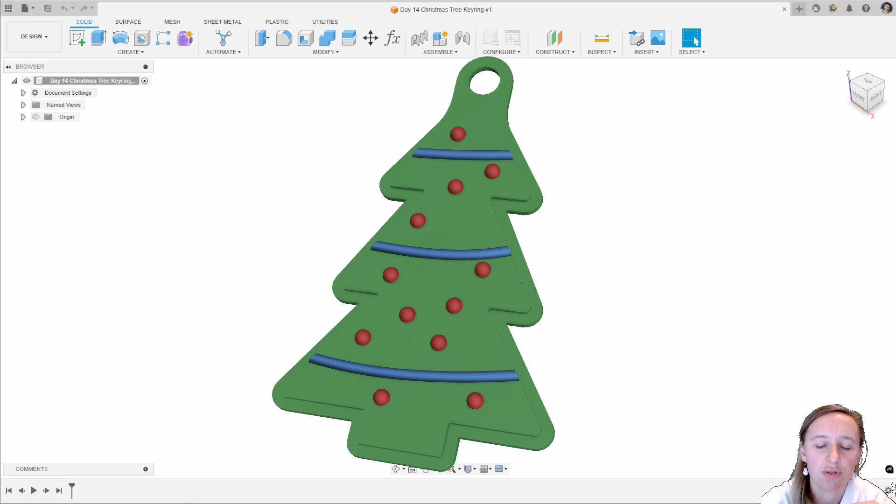For today, we are going to be designing a little festive Christmas tree keyring that you can print on either a dual colour printer or a single colour printer. If you've got a fancy printer like the Bambus, you can start putting in multiple different colours. They're just these small little trees, and we'll go through how you do this in Fusion.

Starting off, I'm going to create a sketch on the XY plane, and this is going to be the basis for my keyring. So I don't want it to be too big. I'm going to give myself a line for the height of this. I want this a construction line, and that's going to be 31.5 millimeters - that's just my overall height of the keyring.

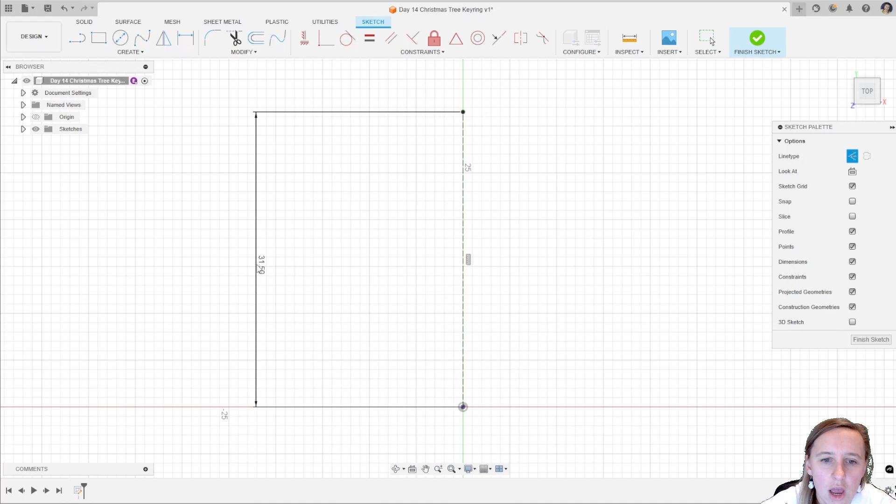I'm then going to use the line tool, turn off construction lines, and just build up that Christmas tree shape that I want to have, give it an outline, and then I will start adding in some dimensions.

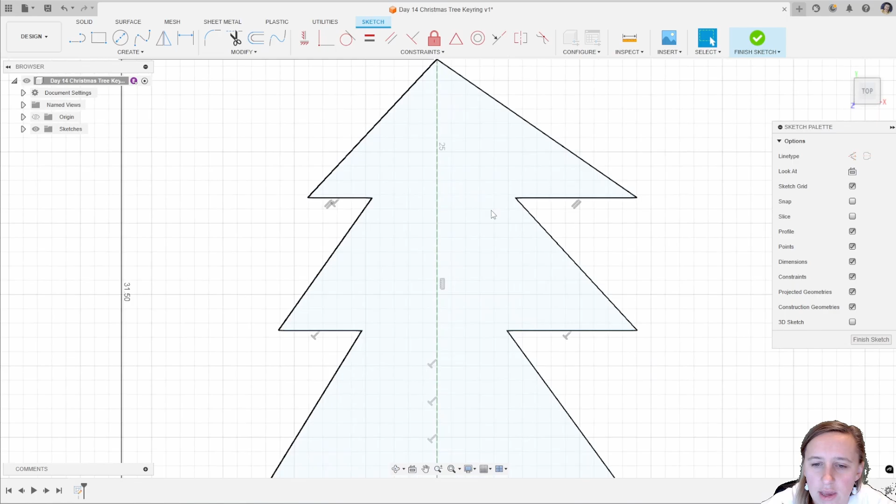I'm using the trick where I take off a line to make sure that they are collinear. The first dimension that I want is this one down at the bottom, and that is going to be 24. I'm then going to add in some symmetry, using the constraints and symmetry, selecting those two top ones, my center line, the next two, my center line, and then the next two and my center line.

Now I want to bring a midpoint constraint of that line at the bottom down to the origin. I'm then going to add a dimension from here to here, and I want this to be evenly split over the whole height. So I'm going to grab that dimension and click divide by 3.

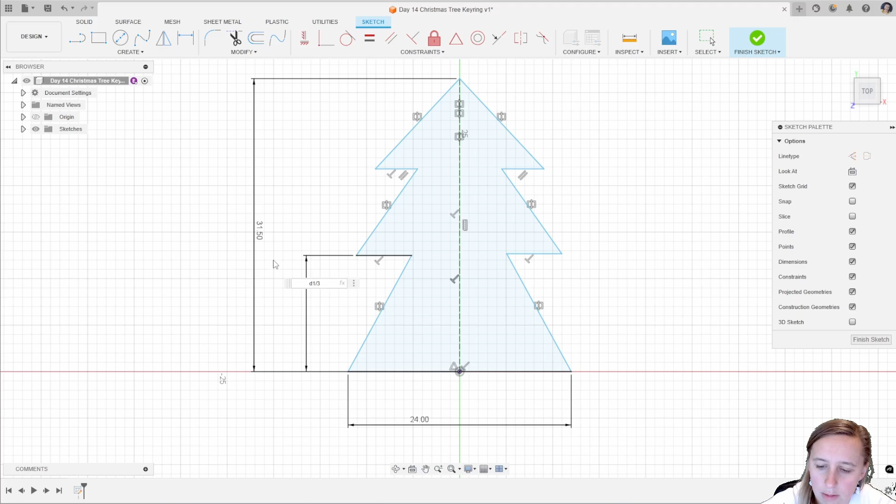And then the same for this one. So you can either type in the same, or I can just click that dimension there, and that will snap into place. I'm going to add a collinear constraint between this line and this one, and again, a second collinear constraint between this line and this line.

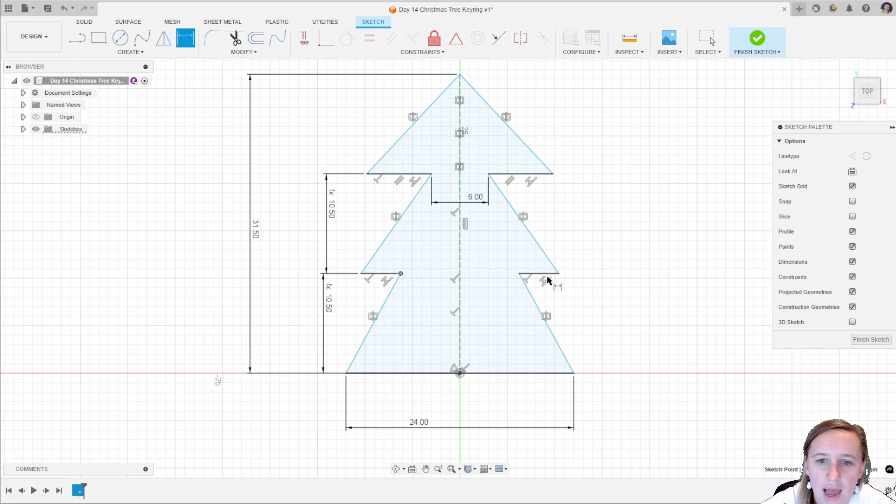I then want to add in a dimension of 6 millimeters here and a dimension of 18 millimeters here. That one is 9.75, and between there and there is going to be 18.

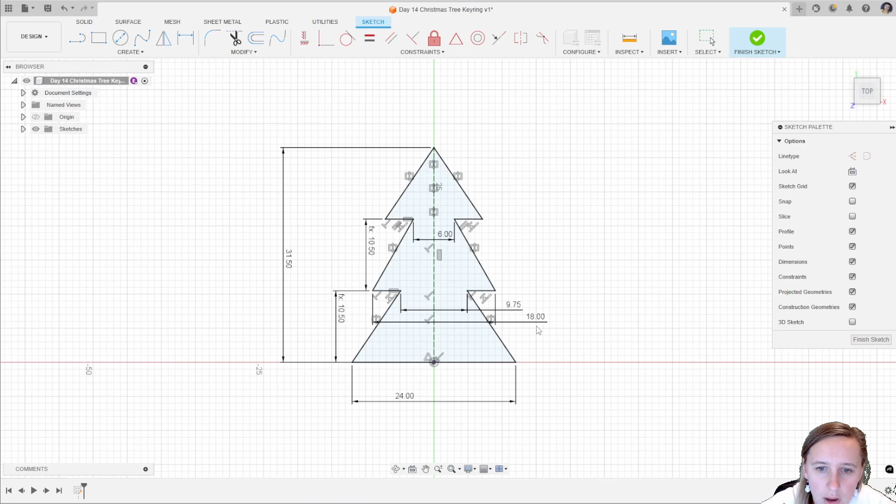I then want to add in a dimension of these two, and I'd like those to be equal. And that there gives me my overall dimensions on the part, and I just want to add in a kind of bottom piece for the trunk of the tree there.

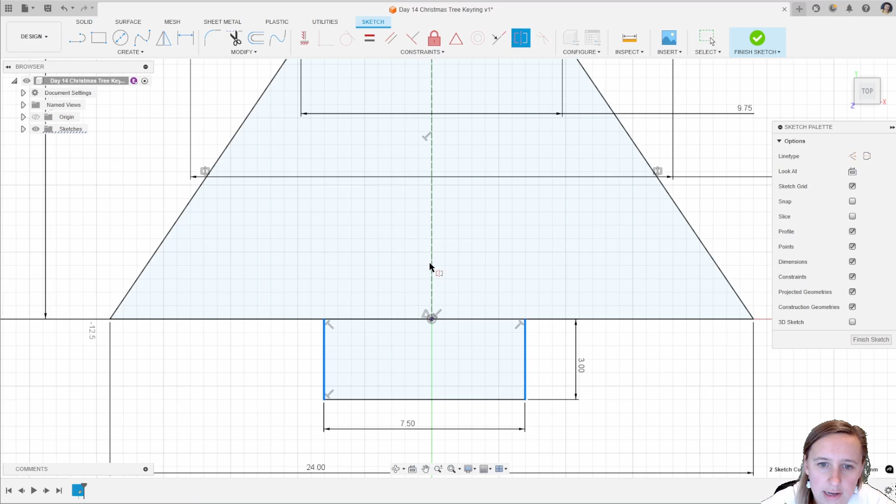So I want that line to be horizontal. The dimension of that I want to be 7.5. This one to be 3, and another symmetry - so I want that line and that line to be symmetrical around there. And you can see there that gives a fully defined and constrained sketch.

So I'm going to click Finish Sketch, and then I'm going to extrude those two profiles by 1 millimeter, so 1 millimeter thick. I'm then going to add in some fillets.

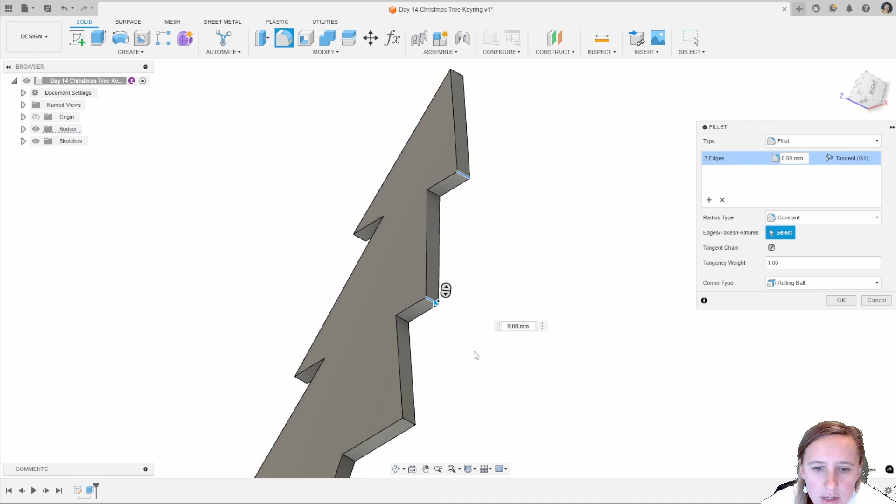Using the fillet tool, I'm going to do these 6 points on the tree. So grab all of those 6 points, and that's going to be a fillet of 0.5. I've accidentally added one, so unselect that one and add that one. So there we go, that's 0.5.

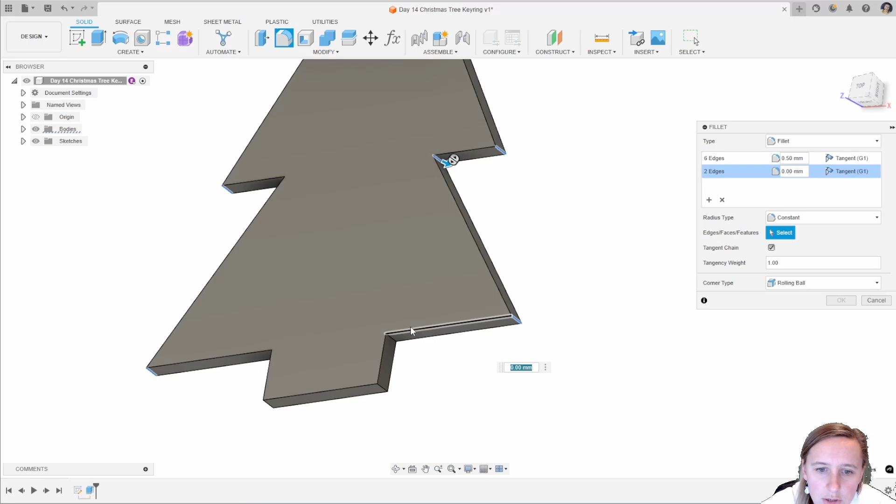Clicking the plus button to add in some further fillets in the same operation, I'm going to grab all of these kind of internal ones and the ones around the bottom of the trunk there - this is just going to give it a slightly smoother finish for the print. So that one's going to be 0.2. And then the final one I'm going to add is to the top, and that is going to be 1.5, just to round off the top.

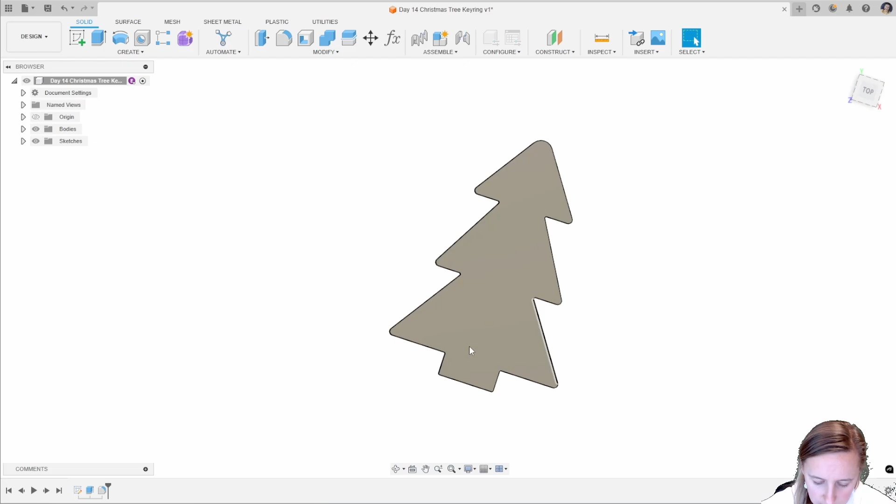And there is our basic outline of the tree. I want to add some decorations to this, so I'm going to use a little trick - I'm going to create a spline and then use the pipe tool for this.

So creating a spline, I just need to go off the edge of the part, adding in these 3 lines that are going to be my tinsel on the tree. And then what you can do with the spline tool is just use these handles to give it a little bit of bend, a little bit of shape. So that line is kind of how you want it to be.

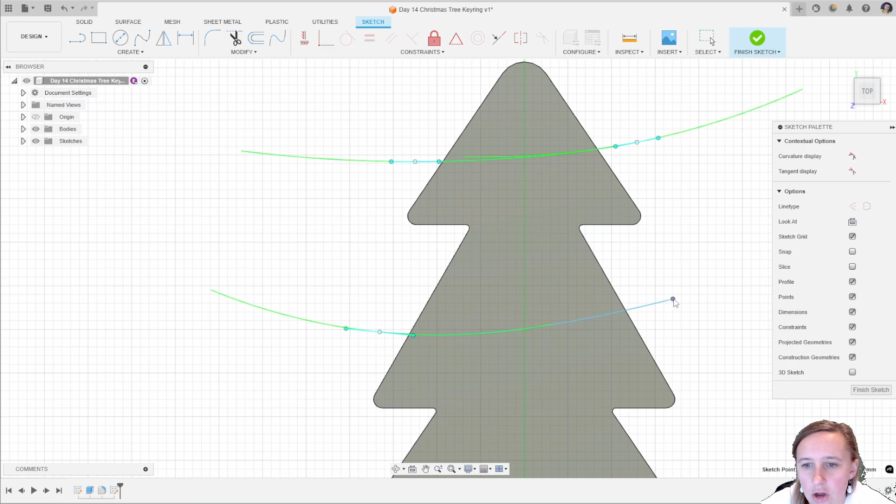And you can sort of add as much bend and as much shape as you like into how you want the tinsel to look on your part. So just play around with that until you're happy with how it looks.

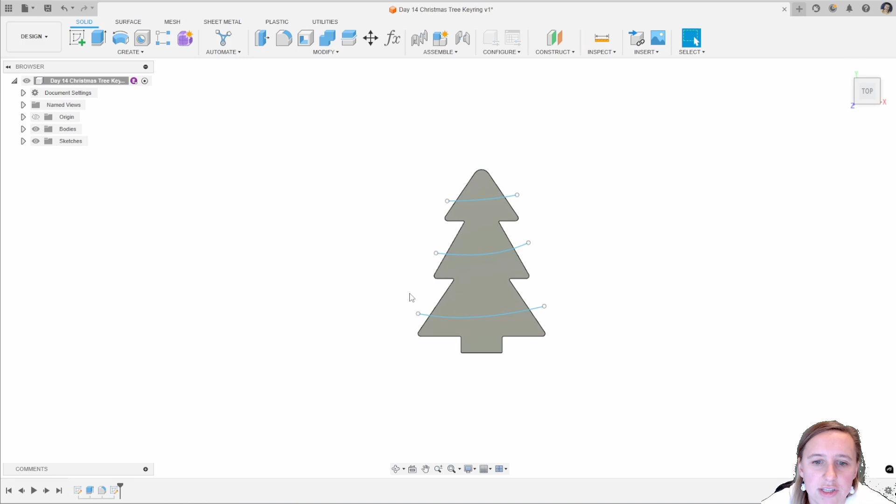And once you're finished with that, click Finish Sketch. We'll then create a pipe. Using the pipe tool, I'm going to grab this - I want the section size to be 1mm and I want to join that.

Clicking OK. You have to do these as 3 separate operations, so just view your sketch, create a pipe and do that again for each of the 3 tinsel pieces in the sketch - create and pipe, and then the operation is join on that.

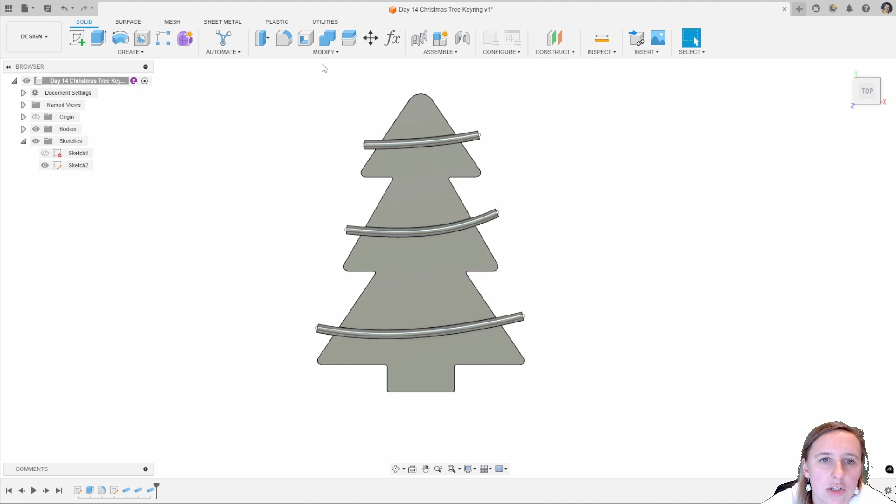I then need to cut off the excess, so I'm going to modify and split body. Select the body that I want, the whole thing, and then the profile is the outer profile of the tree. Just check that's extending as you want it to and click OK.

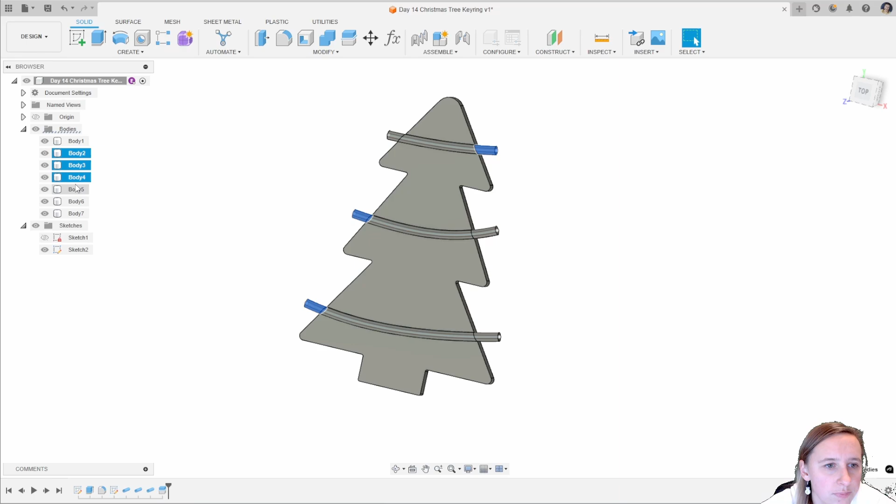We've then got a number of bodies, so selecting the 6 bodies that we don't want in the tree here, right click and remove. That gets us down to just the single body that we want for this tree.

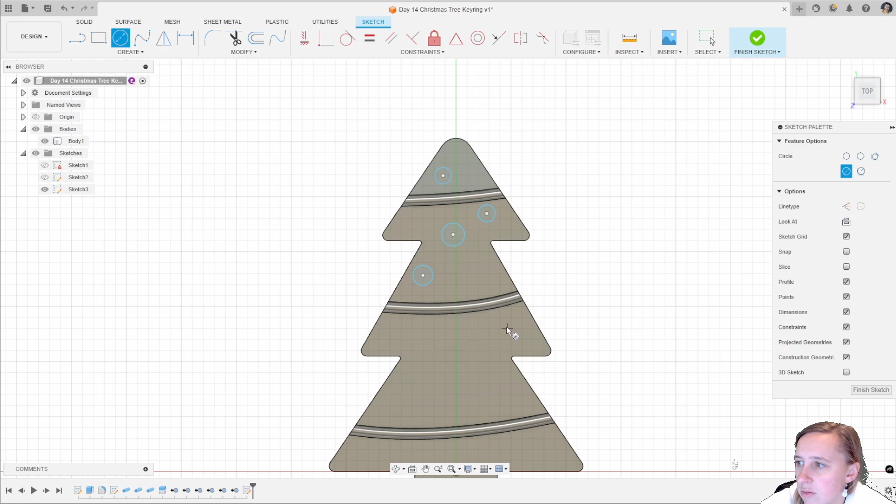I'm then going to add in the baubles. So creating another sketch on that top plane, I'm just going to draw some circles where I want the baubles to be. It's up to you where you want to place these, spread them around until you're happy with how that looks. You can add in as many as you like and place them wherever you would like on your design.

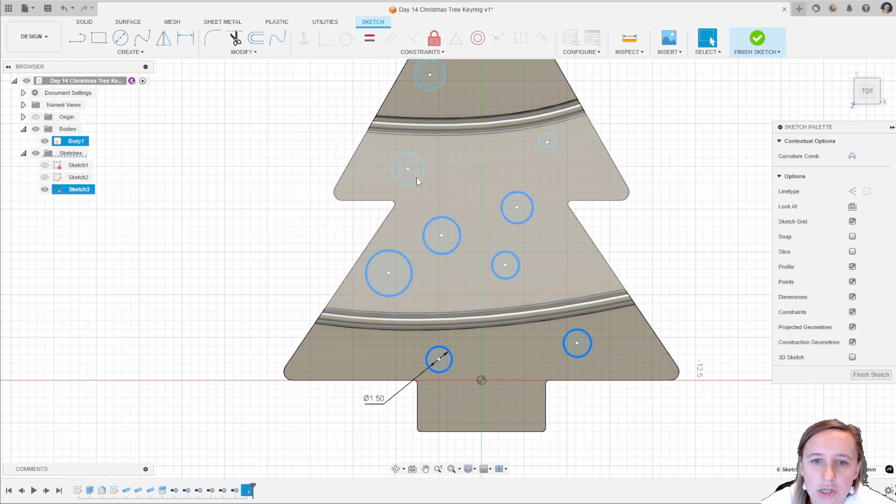Now I'd like all of mine to be the same size, so I'm going to dimension one of those as a 1.5mm diameter. Then select, using the Shift key, every single one of those circles I have drawn, and use an equal constraint to make sure they're all the same size. You can just alter the position of those baubles if you'd like to move them around. Once you've done that, finish the sketch.

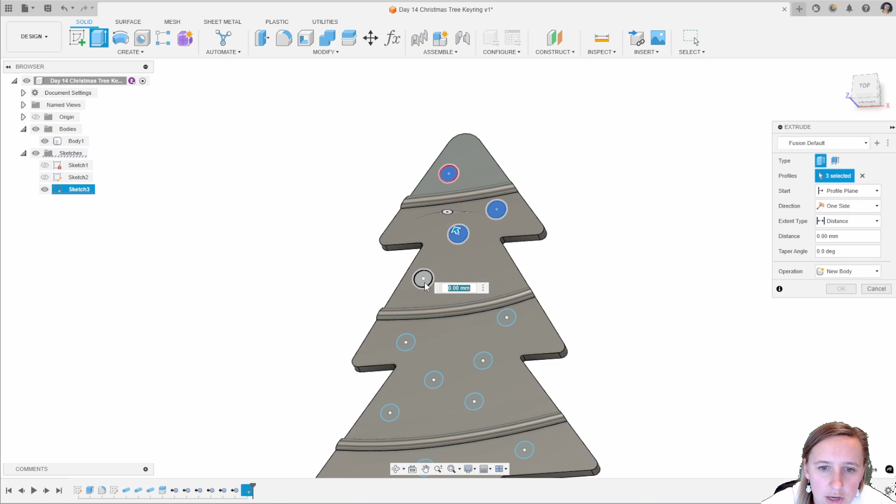Then you're going to extrude each one of those circles that you have created, by a length of 0.75mm, and that extrudes them out to create that there.

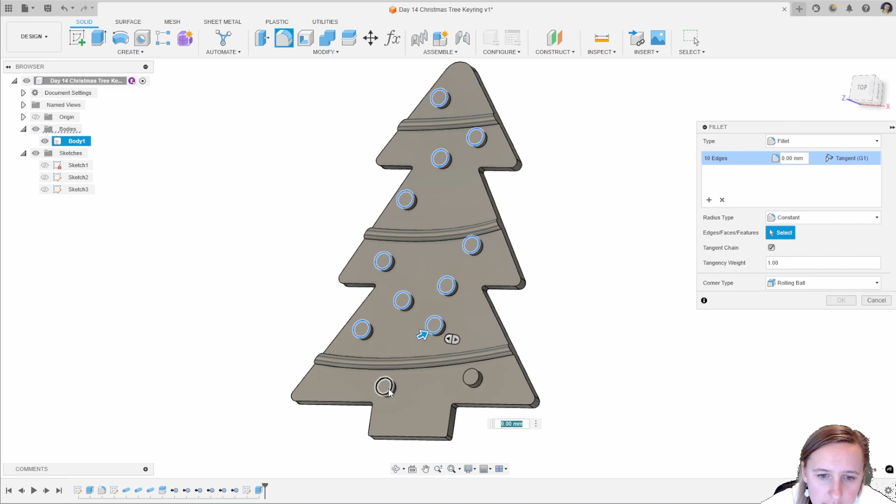I'm then going to add in a fillet, selecting each one of those outside areas of the top ring on each of those extrusions, and add a fillet of 0.75 to give that rounded effect of the baubles. You might want to add a second one here, move them around depending on how you want the tree to look.

Once we've done that, I'm going to create a sketch on the back plane and use the offset tool. So modify and offset, grab that outer profile, and do an offset of 1mm.

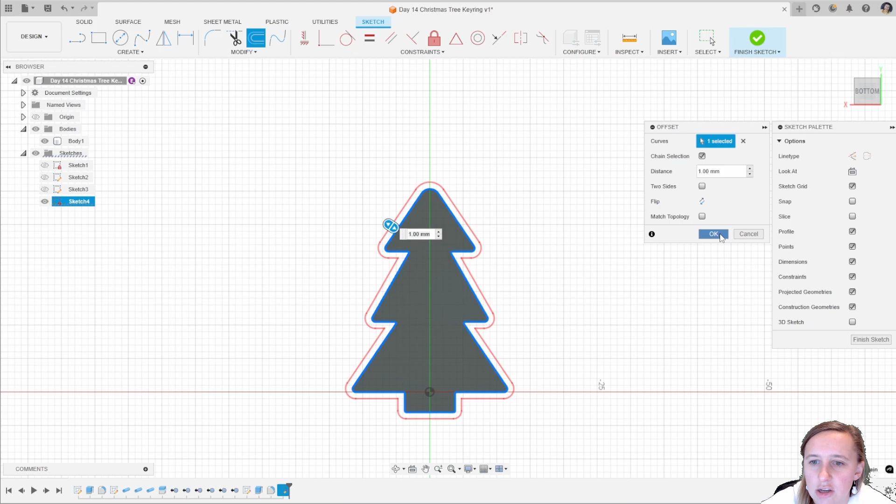Then what I'm going to do is add in a location to add the keyring. So creating a circle of diameter 3mm, I'm then going to do an offset from that circle of 1.2, as my extrusion width is 0.4. I'm going to add in a tangent constraint of that bigger circle to the top of the tree there.

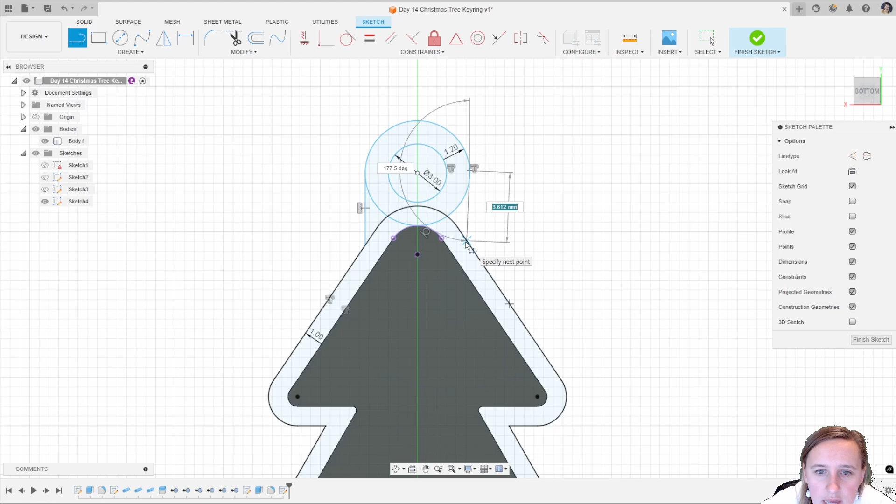Then finally just add in some lines straight down to the tree to create an enclosed profile, adding in a vertical and horizontal constraint and then a tangent constraint to these. Finally, I want to add a horizontal and vertical constraint between the center of the circle and the top of the tree to fully define my sketch.

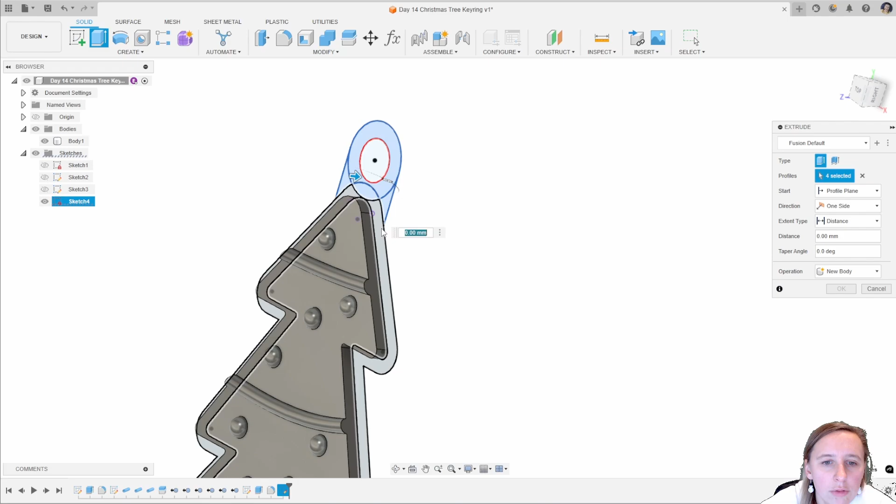I'm then going to create an extrude, selecting all of those profiles, and the distance that I want, so you can just drag the arrow to make sure you're going in the right direction, is minus 0.6. That is going to give us a bit of a flat base to our keyring there.

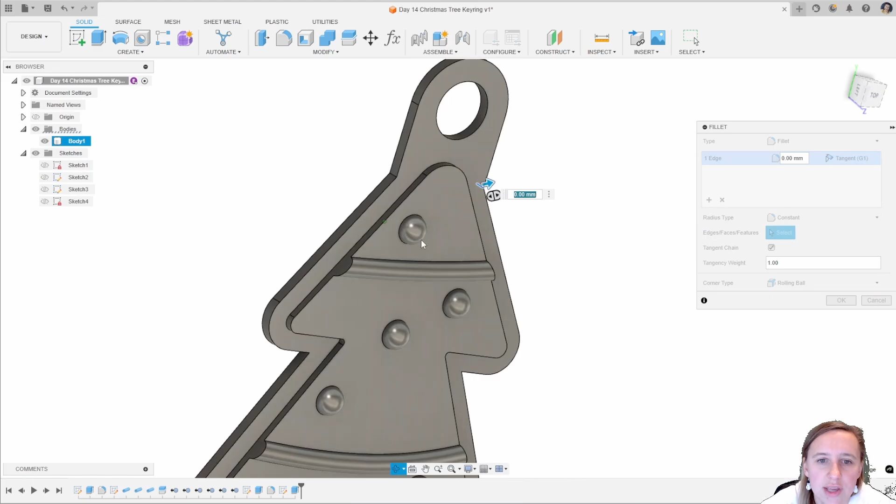One final thing to do is add in a fillet just to round this edge off here. So grab that edge and the same one on the other side, and that's going to be a 5mm fillet there.

Now, if you are printing this on a single extrusion printer, you can go ahead and save the STL file out at this point. Or if you have a fancy slicer where you can paint different colors for dual material, you can also save out as one single STL at this point.

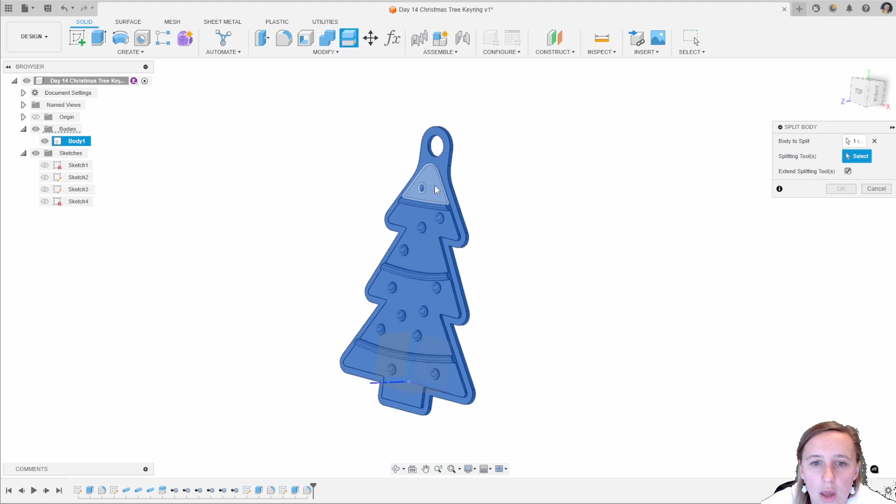If you're using an extruder system that needs different bodies for each of the different colors, this is where you can split the bodies up in Fusion and export them. So if you need to do this, go split body, modify split body, select the body, and your splitting tool is going to be this top face. Select that face, and if I go right hand view, you'll see where that's splitting the body, cutting off the tinsel and the baubles on the part there.

Clicking OK, this will create a number of bodies. So those are all in one body - these are all the individual bodies that you can then use in your slicer.

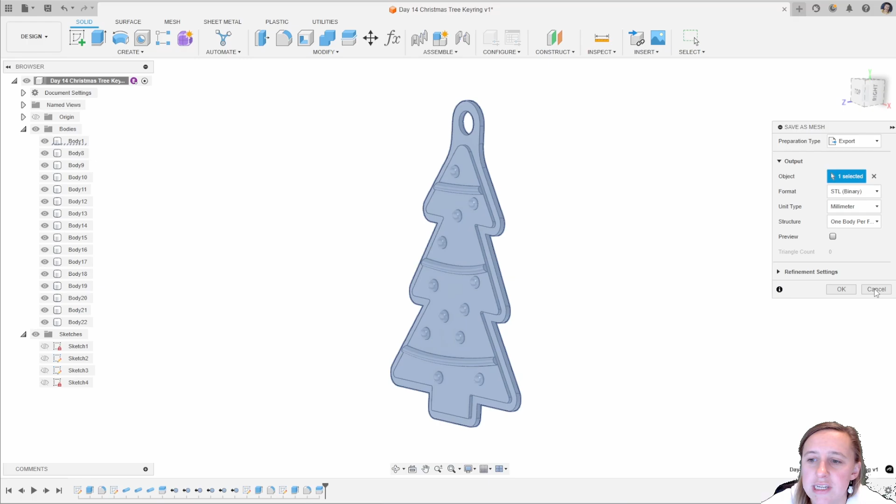Now to export this, you can right click Save as Mesh, and instead of one file, you can say one body per file. This will create a single STL for each of the bodies in there. You can then load that up into your slicer, arrange it, and select different colors if you have that type of 3D printer.